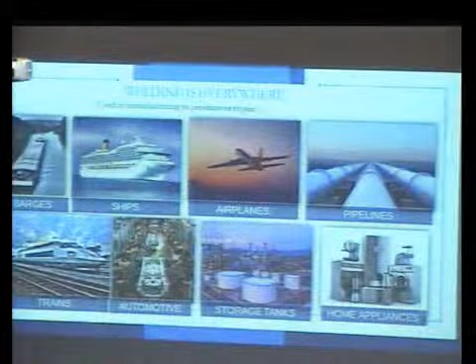So I want to talk to you about welding basics. I want to say basics and introduce how welding is. What about welding? That's the first question we can have. Welding is everywhere. You can't imagine a world without welding.

Barges, ships, airplanes, pipes, trains, automotive, tank storage, home appliances, bridges, buildings, ornamental ironworks, construction. You are sitting on a welded system. You lift your head up and you see welded structures. Welded structures are everywhere. But it's so common that everybody thinks it doesn't exist.

And welding is very interesting because we're welding steel. And steel is 100% and indefinitely recyclable. And in a world in which we talk about the Green Deal, where we've got societal responsibility, sustainability, welding is everywhere.

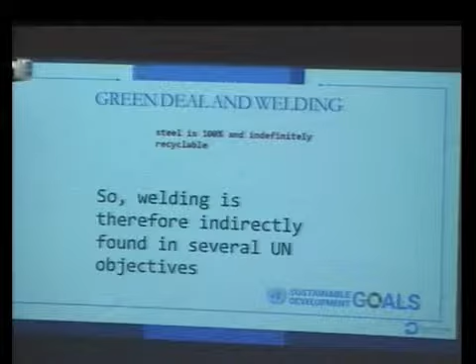Everywhere. And just for an example, if we talk about the sustainable development goals of the United Nations, there are 17 points. And in these 17 points, you can find more than 10 points where welding is present. For example, zero hunger. How can you achieve zero hunger without agro-food? Agro-food is piping, capacity, tanks, etc. When you talk about health, pharmacy, medicine, how can you make vaccines without welding?

It's impossible. When you talk about water, you need pipes, and pipes are welded. When you talk about energy, we'll talk about energy after, but energy without welding is impossible. Industry, it's normal, I don't speak about that. Civil construction, engineering, all is steel, all is welded. New energy, climate action, manufacturing, transport. Life below water. You have pipes, you have submarines, you have ships. We are everywhere. Everywhere is welding.

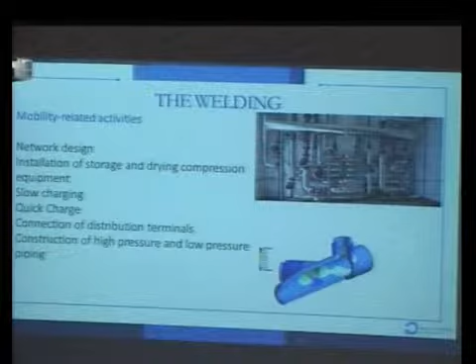Industrial pressure vessel companies are aware of the key environmental issue and actively participate in the deployment of industrial solutions that will allow the objectives to be achieved. Okay. Mobility, when you talk network design, installation of storage, drying, compression, slow charging, quick charging, connection, distribution terminals, all is welding.

You talk about gas, biogas, new gas, and so on. You have to tank them. You need skids. I don't speak about hydrogen. Everybody says the new generation, the new power will be hydrogen. Hydrogen, high pressure, low pressure pipes, storage, drying equipment. You talk about solar. It's good to talk about solar, but to put up your solar, you need structures, and structures are welded.

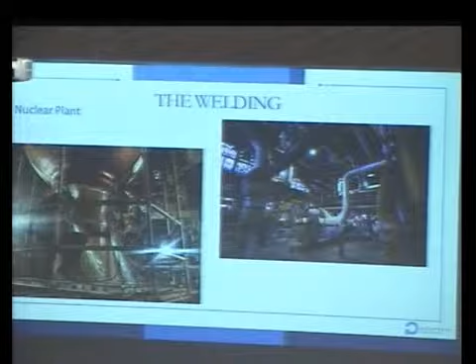Wind turbines are welded. And I finish with what we like in France, nuclear plants. A nuclear plant, what is it? It's a big steam system with pipes, with turbines, all welded. So welding is everywhere.

We can talk about the story of welding. Welding is very old. 2000 years before Christ, we talk about welding in the Bronze Age. People began to join parts together in the Bronze Age. Egyptians and other peoples were joining pieces of iron together. During the Middle Ages, we began to talk about that.

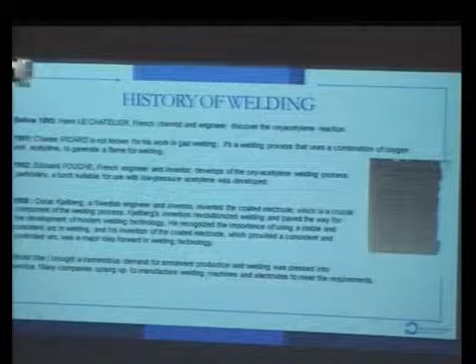But the real story of welding begins in 1901: Charles Picard, a Frenchman, worked on gas welding. The process is a combination of oxygen and acetylene. At the same time, Edmond Fouché, a Frenchman again, engineer and inventor, developed an oxyacetylene welding process. In 1908, Oscar Kjellberg, a Swede, had the first patent to weld with an electric arc.

And it's a shame, but war is always a time to develop new technology. During the World War, new welding products were made. Many companies tried to manufacture welding machines and electrodes. From 1920, the French Welding Institute worked on the development of welding. The first welding job was introduced in 1931, less than a century ago. It's very young.

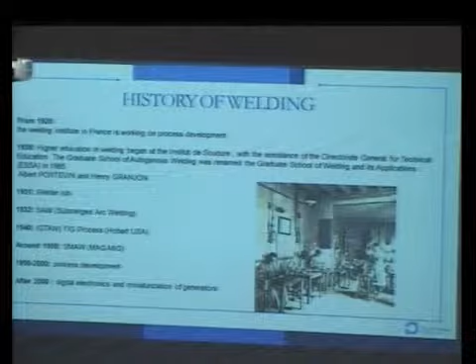1932, submerged arc welding. Around 1950, new processes. And the new technology is after 2000, very recent, with the development of electronics and miniaturization with data systems. At the same time, and that is very interesting, we developed an International Institute of Welding. What is it? In 1948, people from different countries said, we have to work together on welding. And they began to develop an International Institute of Welding.

And in 1963, there was the first publication of a review named Welding in the World, Soudage dans le Monde. At this beginning time, this review was in 2 languages, French and English. After, in 1992, with the development of Europe, it was extended to many countries in Europe, and in 2000, this International Institute of Welding was all around the world.

And today there are more than 34 active ANBs. An ANB is an Authorized National Body, a country authorized to provide welding training following this program. And more than 17 countries belong to this system.

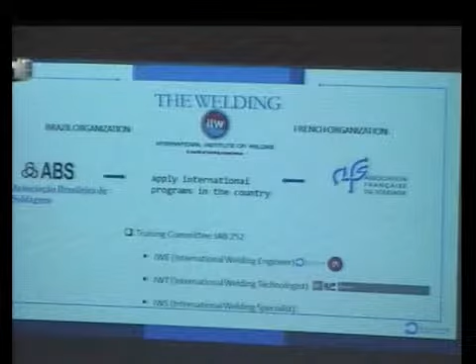That means that the International Institute of Welding applies an international program, and this program will be in a country. In France, we have the Association Française du Soudage, an association who takes the international training program and translates it in France. In Brazil, you have the Associação Brasileira de Soldagem. I don't speak Portuguese. It makes the same one. And there are 3 levels of training.

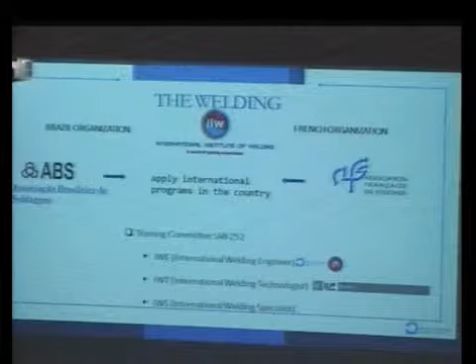IWS, International Welding Specialist. What is it? He's a welder who knows a little of technique. The second level is International Welding Technologist, a technician in welding, specialist in welding. And the third level is IWE, International Welding Engineer.

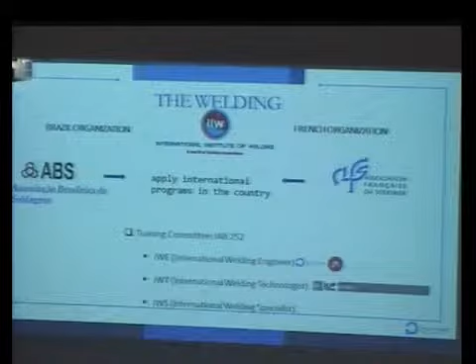The 3 levels are recognized by the IIW, and in Montpellier, at the University of Montpellier, we are lucky because we have two levels. We have engineer masters IWE in Polytech, and we make welding engineers. The students follow a training, and after they pass this certification, they can be welding engineers around the world. You have a Chinese, Brazilian, or someone who has the same diploma. You're sure that he has followed the same training.

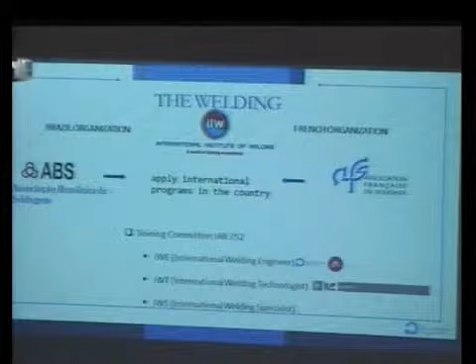IWT, we have it at the University of Montpellier too, technician, and we make the same program. And the two girls from Polytech did the IWT program last year. That is very interesting to show that welding today is around the world. We cannot say we are Brazilian and we weld in Brazil, we are French, we weld in France. We are around the world. It's globalization. And it's very interesting to see that a system is globalized.

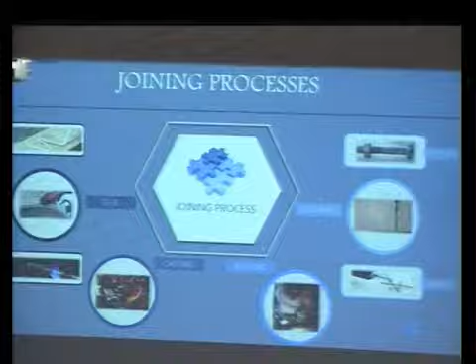And we assemble, how welding is made, by an assembly process by localized fusion of the edges. That is the definition. We assemble by localized fusion. Localized fusion, when you talk about fusion, you talk about heat. And the base of welding is a heat source. You have different types of heat source. It can be mechanical, it can be chemical, and most of the time it's an electric source.

Some of you are maybe chemists, and you know when you have steel and you make high temperature, you have oxidation, oxidation with the oxygen of the air. So you obligatorily have a protection mode against the effect of the air. And the two first points are theoretical. You have two pieces, you have heating, you have a mode of protection.

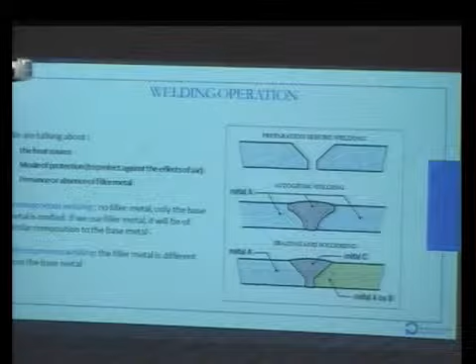But when you think as a mechanician, it's very difficult to have two pieces exactly one against the other. You always, or almost always, have a gap between the two pieces. So you have to put in a filler metal. If the filler metal is the same as the base metal, we are talking about homogeneous welding. When the filler metal is different, we are talking about heterogeneous welding.

I made a slide about health and safety in welding. When we talk about heating, very hot temperature, it's burning. You have risk related to fumes. When you are welding, you melt metal, you have fumes, steam of steel, of iron, of different metals, and it's dangerous. We use shielding gas. When you use shielding gas, there is a risk of anoxia. When you have metal at high temperature, more than 1,000, 1,500 degrees, you have risk of projection and hot parts.

When you have an arc, you have optical radiation. You have noise. When you use electricity, you have electrical risk, electromagnetic fields, and fire and explosion. So people who weld have to be protected. And you see on this picture a minimum, with gloves, with helmet, and so on.

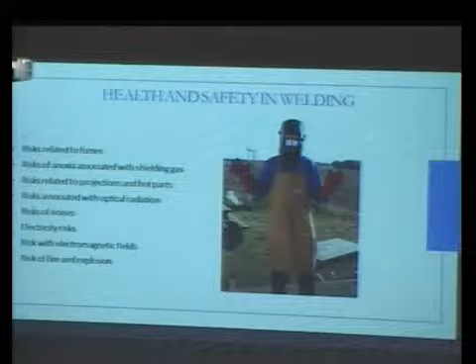Now I want to talk to you about the consequences of the welding operation. When you want to weld, you have to make high temperature. You have expansion and shrinkage. At low thickness, high deformation, but low stress. At high thickness, little deformation, but very, very, very high stress. Because you don't have deformation, the deformation is inside the metal, and you have big stress.

After welding, we often have to make a heat treatment. We have to make high temperature to reduce residual stresses. That's the first point. The second point is modification of the metallurgic structure. When you bring steel to high temperature, you change the structure. For iron steel, you pass from BCC to FCC, so you have modification of the structure.

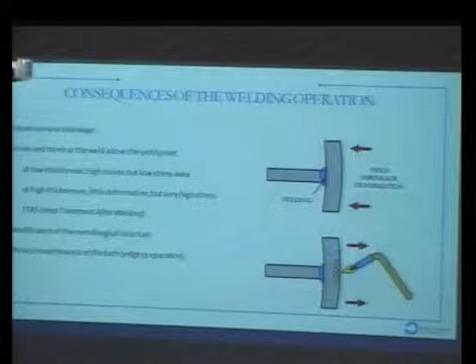The first part is easy to understand, but we have to think about it. When you weld, you melt metal, and when you melt metal it becomes liquid. The liquid wants to fall, and the big difficulty in welding is to maintain this part of metal that is liquid.

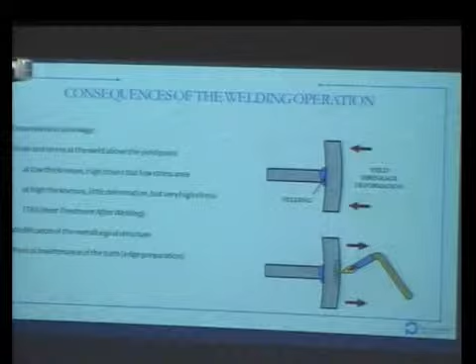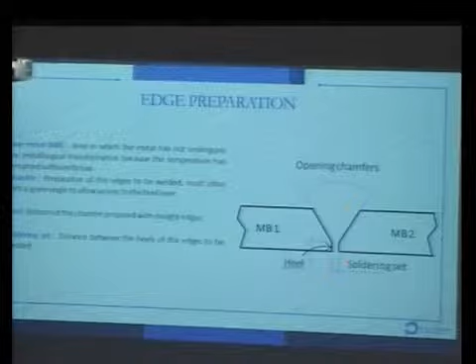These three parts are consequences for the welding operation. For example, when you weld base metal 1 and base metal 2, if you take a big thickness, more than 3-4 millimeters - I say big, but it's not that big - you want to have here a laser point, and you want to have here metal liquid. If you take all this metal liquid across this thickness, it will be very heavy, and too heavy, it will fall and make a hole. So you have to prepare it with a chamfer here.

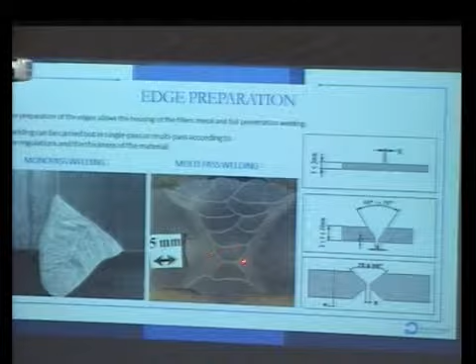You have to prepare the joint. We want to make one root weld, and then make more welds to fill it. For example, here you have a root, and the preparation was like that. You make a root here, and then we make different passes to fill it. In this case, the root is here, and you have 1, 2, 3, 4, 5, 6, 7, 8 - eight passes on one side and two passes on the other side. If you are thinner than 3 millimeters, one pass is enough. We call this monopass welding or multipass welding.

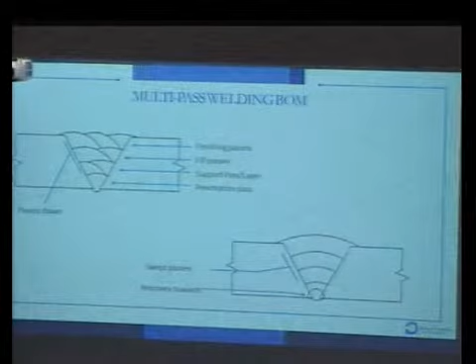That is an example of penetration roots. Second point: the thermal aspect of the welding operation. When you weld, if you take a thermocouple, you can measure the temperature. When you weld at a point, the temperature grows up and then falls down. Here it grows up, and by definition it's higher than the melting point.

So the time spent around 800 degrees is very important, because if this time is very short, you have a risk of martensite. If the time is longer, you don't have this risk.

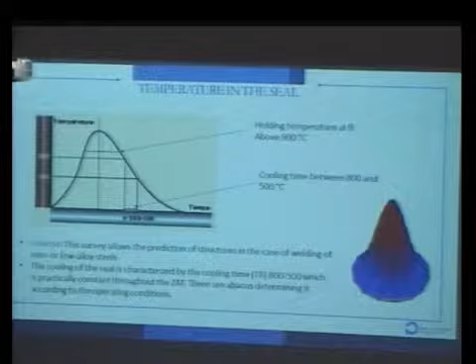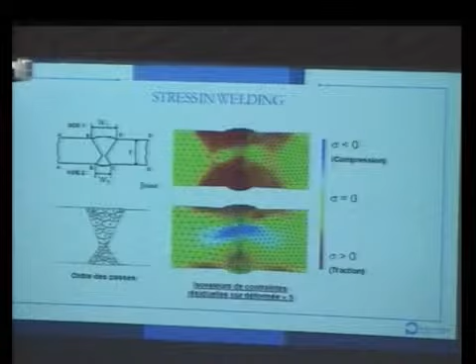When you weld, you have here the welded zone. By definition, this welding zone is higher than 1500 degrees because we melt it. Far away from the weld, you are at normal temperature, but in between you have a zone called the heat affected zone. It's a zone where temperature is higher than 900 degrees, and for iron steel we have a change due to this temperature. We have stress here. For example, you can see the molten zone from pass 1, the molten zone from pass 2, and on both sides you have a heat affected zone - the zone where the metal was transformed.

If you take a low carbon steel, as used in welding, you see that at this time you go up into the austenite phase, and if you cool rapidly, you can have a risk of quench. So don't forget: you have the melted zone, and on each side of it you have a risk of quench, and it could be very different.

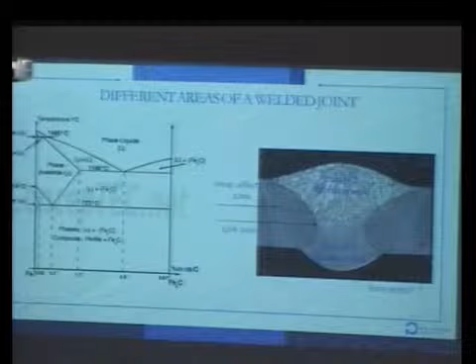When you weld, you have stress in the weld - deformation, and during welding you have different stresses, compression and traction, which create deformation or stress inside the weld. So when you weld, you have a melted zone, and around the welding zone you have different weld structures.

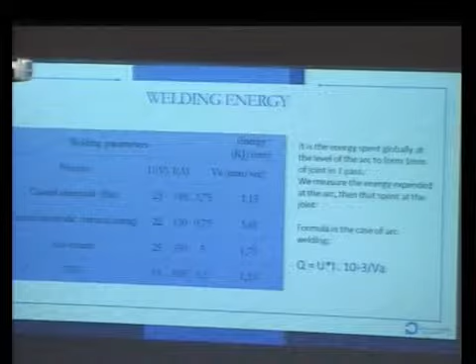What is important? The first very important point is the welding energy. If you put in more energy, if the energy is high, the piece stays hot inside, and the cooling will be slow. If the energy is low, it will cool very fast, and you have a risk of quench. So the heat input during welding is very important in determining the risk of quench.

For example, with two pieces, the cooling will happen here. With this kind of welding, the cooling will occur here, here, and here, and there will be more risk of quench than with lighter cooling. Often, to prevent the problem of quench, what we have to do is preheating. We want to preheat the piece before welding to prevent the risk of quench.

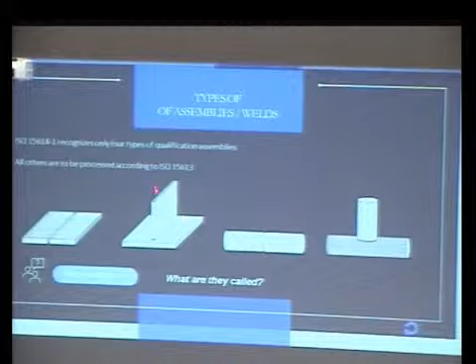For example, here you have three parts. Here is a butt welding with tubes, and here you see that this kind of welding will cool very speedily compared to this. And maybe for this you have to make a preheat, and this you don't have.

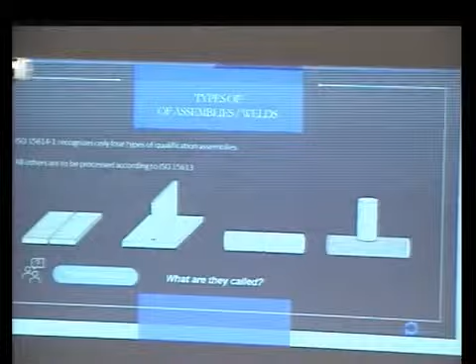By conclusion, what I want to say is that welding, generally, requires big energy to melt the steel, and many consequences result from this. With this consequence, we have deformation, for example that.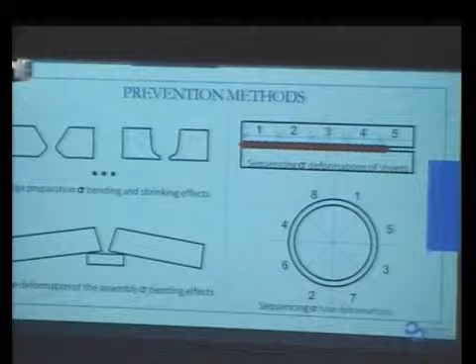When you have to weld, you have to think about the consequence of welding. If you have any question, I'm here to answer. No questions? You made welding before? Yes? With Professor Ivan, maybe? Okay, so you know what I explained.

Okay, any question? No question? So if you don't have a question... Thank you, I learned lots of things.

Question: the origin of energy, we know it can be optical, like you can hit with laser. You didn't mention it because it's just a small amount of welding, out of five big kinds of energy.

Electric energy has two parts: with arc, 80%, and part with Joule effect. That is electric. You have chemical energy with gas, a mix of acetylene and oxygen or different gases. You have mechanical energy, for example friction or friction stir welding. You have friction and mechanical energy put into this energy to weld.

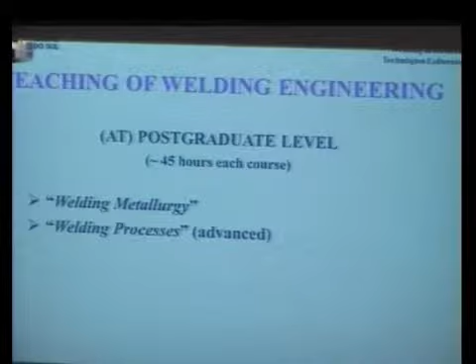For the postgraduate level, we have 3 main classes: welding metallurgy, advanced processes, and design of welded joints. Of course, we offer those classes when we have students.

Nowadays we have few students. In the past we had a lot of students in postgraduate, and that's a problem for us as well. I know it's a worldwide problem, but that's true.

We have all conventional welding processes: gas tungsten arc welding, gas metal arc welding, shielded metal arc welding -- everybody has seen this in the streets, people welding. That's shielded metal arc weld -- plus submerged arc, resistance welding, plasma cutting only, oxy-gas cutting and welding.

We have a small robot you've seen yesterday. It's a good robot and a very, very good power source. We had an extrusion press to make electrodes. We can make any kind of electrode.

And in our laboratory was made the first electrode in Brazil to weld underwater -- wet welding. You go up to 30 meters and weld wet, in contact with water. And Petrobras uses this nowadays.

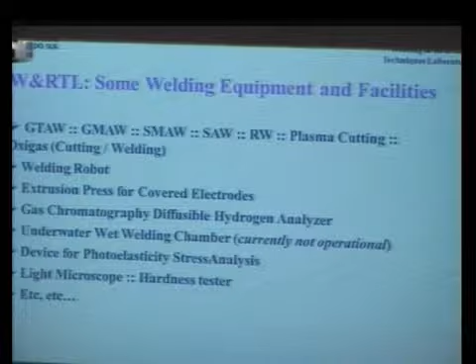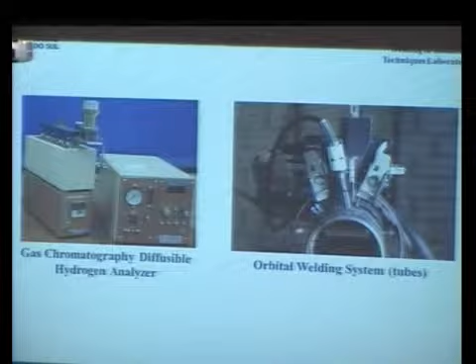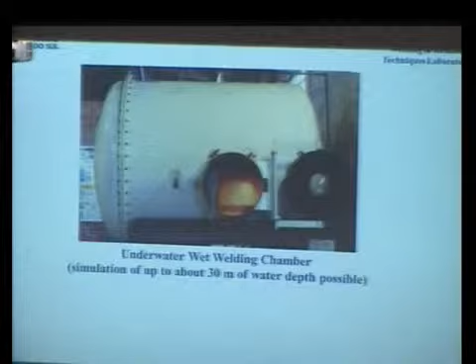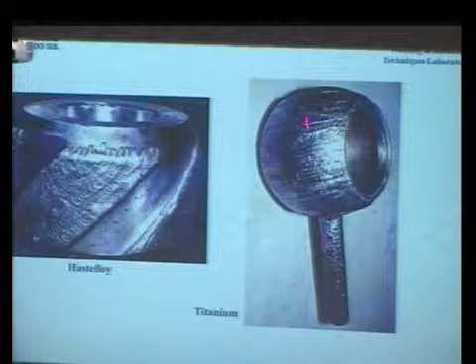With time, the acids attack the surface of the valve. And then you have to weld it all again. It's commercially pure titanium. You have to make a chamber with high purity argon. It's very expensive, this one. And weld during one day, things like that.

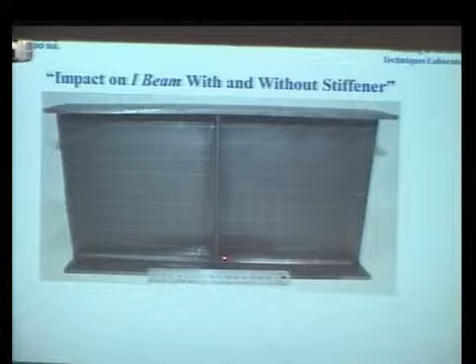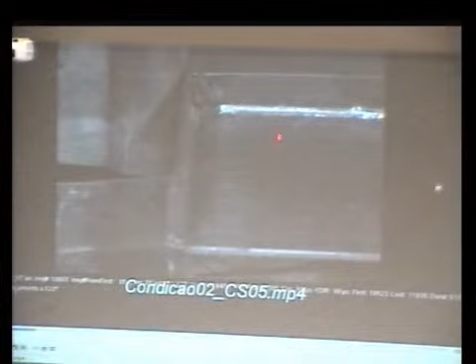You can show the second. That is with stiffeners. Look at the difference. It resists much more. Of course, our interest is in the welding, the behavior of the welding. What we're noticing now is that it's much better to put there a more ductile weld than a more resistant weld. The problem is not strength, it's ductility.

It's like how to speak to people, for example, to have empathy and things like that. It's the same, ductility is the same. You have to have ductility, not to be very rigid. You have to exchange interests. That's very interesting to notice in this. Okay, we're going to the end, and then I'll ask you some questions, okay?

We had in the past some experience with finite element analysis of mainly fillet welds, and you have very good computer equipment there. Professor Mazzaferro works a lot with this. But this is mine, I did it, only to prove the following. You cannot use finite element analysis in the elastic state. I'm lacking the word. You must use it in the plastic state.

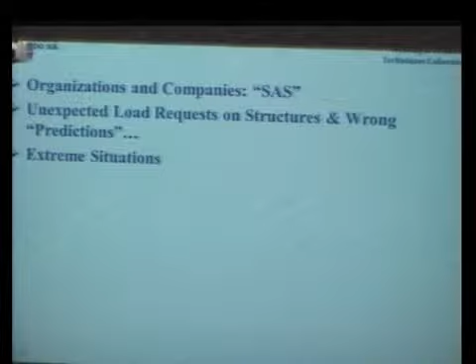That's an important point. The second point is that our engineers in general don't look for unexpected loads. They make wrong predictions. They believe too much, I think, in mechanical tests and so on. They think that a tension test truly gives the ductility of a metal. That's not true. We have to be prepared for extreme situations. The climate is changing. That is important also. We must not make idealizations on structures and load conditions.

That has relation, of course, with this one. Those two are the same things. Also, idealizations on information. Not all information is real information, is right. Materials in people. There is a real world. Many students don't know that there are inevitabilities, things that the British, for example, call acts of God. No one knows what causes them. This exists.

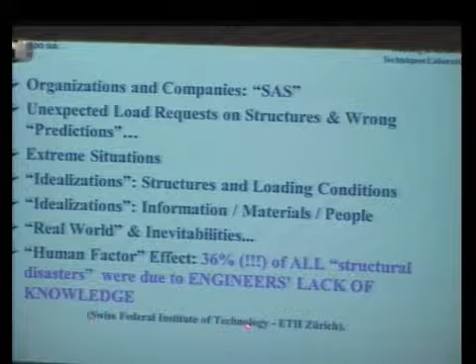And to end, a question of the human factor. About 20 years ago, the Swiss Federal Institute of Technology made a study with 800 consultants, engineering firms, and they discovered that 36% of all structural disasters were due to engineers' lack of knowledge. Engineers' lack of knowledge. That's brutal, I think.

Well, thank you very much for hearing me, and I would like to ask you, Professor Dennis, first of all, in which kind of engineering course in France do you study welding technology? In which one? Mechanics, materials?

In France, we have three kinds of engineers who become welding engineers. The first enter from mechanical; they have a mechanical base and they learn welding. The second are material engineers. They come from materials, from steel and so on, and they enter welding through welding metallurgy. And the third are people from electricity. Because most processes in welding are electric, some engineers come from electrical fields and discover welding through electricity.

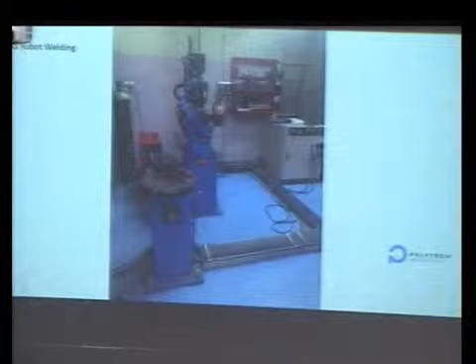We have 6 SMAW, new generation, very small, a water jet cutting from 1 meter to 1 meter. We can cut metal without heating, and it's very interesting. It does not transform the metal. A small MAG robot welding, like you. Cutting, forming, oxy-fuel cutting, plasma cutting, a small table of plasma cutting.

No, this one is not underwater. No, we can, but it was too expensive. Yeah. Yes, we cut underwater with 2 centimeters of water. Oxy-fuel welding, orbital TIG to weld tubes.

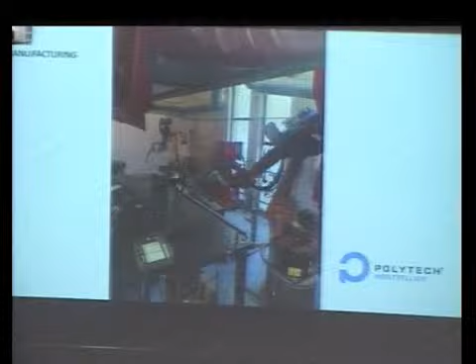We have in research WAAM, 3D printing by welding. Wire arc additive manufacturing. And we make 3D printing with welding. And we work in research on the mechanical characteristics of this kind of structure.

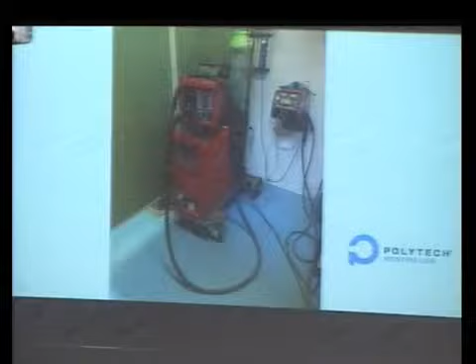GMAW, steel and carbon steel, new generation, old generation. The last generation of GMAW machine, GMAW mini. Here you have a system to record all the parameters during welding. The student welds, and we record all the parameters on the computer, and the student can see all the parameters and what happened during the welding. And all can be recorded to repeat what to do.

That's the GMAW new generation, the new one. GMAW, GMAW saving parameters, GTAW, TIG, new generation, old generation of TIG, TIGer process, if you know. A small plasma welding. We talked before about high density of energy. With plasma, we try to have an arc, but concentrated. With the mechanical system, the arc is concentrated. We have more energy in the same surface.

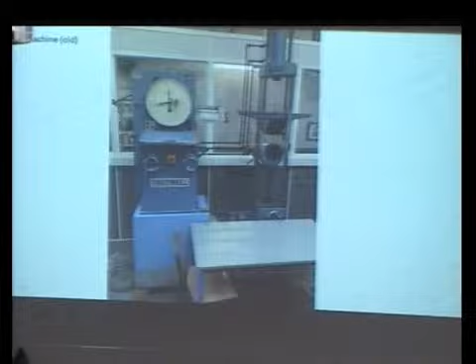GTAW. We have an electron beam machine, a small electron beam machine. Yeah. And we have a very expensive machine, a vacuum furnace to make brazing, for example. A tensile machine, I wrote old. She's old, but maybe it's the best machine that I know. Because the student sees, during the test, he sees here what's happening. He sees the pen. He sees really what's happening.

A hardness machine, a small furnace, a microscope like yours, with a polisher to prepare the samples, a Charpy test, really not bigger than yours. Yeah. A tensile machine, new generation with a computer. You don't see anything. You see a computer. A big 40, 50 tons tensile oil machine. It's very interesting to make bending in welding. We make high thickness, more than 10 millimeters tensile. And for 40 tons, when you tensile 40 tons, it's very impressive.

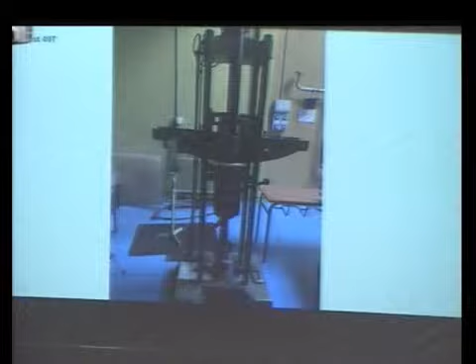And I don't know if you go, it's a small link. I don't know if you can go. A film we made in Polytech to present a laboratory, but the data computer is more complicated. Maybe on my computer. Yeah. So that part in Nîmes.

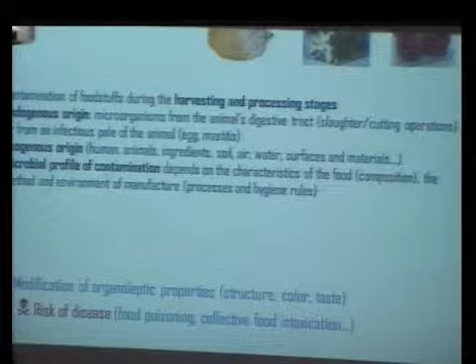Now, let's talk about lipid oxidation. So lipid oxidation is a complex chain reaction. The objective is not to learn all the steps of this reaction, but to understand what are the main risks with this reaction. So it is the reaction that occurs in high-fat foods. And it is a complex set of decomposition and polymerization reactions. It involves unsaturated fatty acids, and you need dioxygen.

But there are different ways to have lipid oxidation. It can be favored by light radiation, but also transition metals. We also have some enzymes like lipoxygenase that are involved in lipid oxidation. How do you know that your butter or your fish is oxidized? How do you know? What? It changes color?

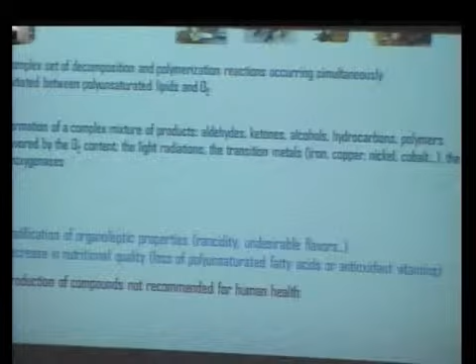It can be, but it's not... the smell. Yes, there is rancidity. You have a modification of organoleptic properties like rancidity, undesirable flavor. It can change the color, but it's not the main effect. But there is also a decrease in the nutritional quality because it's an oxidation. So what will happen if you have vitamins? The vitamins will fight against this oxidation. So you lose the antioxidant capacity of your products because the antioxidant compounds will fight against the lipid oxidation.

Are you going to die if you eat some oxidized lipid? No, not today, not today. But yes, it is a risk, but in the long term, because the consequence is the production of compounds not recommended for health. And if you have the habit of eating oxidized butter, chips, and so on, yes, in 10 or 20 years, perhaps we can have some problems. But tomorrow, no. So it is also an important reaction to be avoided in products.

Another big family of reactions that are involved in food spoilage is non-enzymatic browning. As the name of this reaction indicates, you are going to produce some colored brown components. The famous example of this kind of reaction is caramelization, when you use sugar. And how do you make caramel?

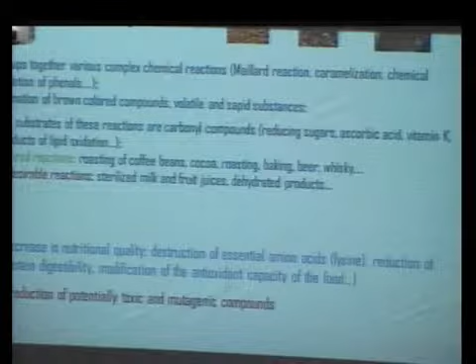So, as I told you, it groups various complex chemical reactions. The substrates of this reaction are carbonyl compounds, reducing sugars, but also ascorbic acid, vitamin K, products of lipid oxidation, and so on. And it needs heat. And what is important, it can be a desired reaction. In some food transformation processes, we need this reaction to develop aroma and taste.

For example, in all the roasting processes of coffee beans, cacao, the roasting, the baking, the beer, the whiskey, the brown color of these products comes from the Maillard reaction. But in other cases, it's not desired at all. For example, when you sterilize milk, you don't want to have brown milk. You want to have white milk.

When you concentrate fruit juice also, you have to avoid this reaction. What is the consequence of this reaction? We have a decrease in the nutritional quality, because during this reaction you have a polymerization between reducing sugars and essential amino acids in proteins. So we have a loss of essential amino acids in foodstuff. You have also a reduction of protein digestibility due to the polymerization between all these components, and a modification of the antioxidant capacity of the food.

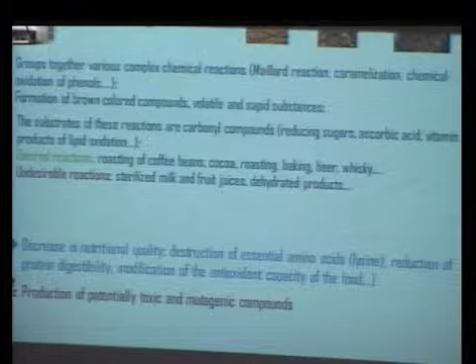Okay, the last reaction I want to tell you about today is the enzymatic browning reaction. The consequence is also the production of brown colored pigments and so on, but do you need heat to make that? No, you only need polyphenols in fruits and vegetables, and you need dioxygen. So it's an enzymatic transformation in the presence of dioxygen, a transformation of phenolic compounds into quinones, then into colored polymers. The enzyme involved is polyphenol oxidase, and we also need oxygen.

You are going to form color pigments, melanins. They are often brown or black, but they can be pink, red, and blue. As for non-enzymatic browning, it can be a desired reaction. For example, in the ripening of dry fruit, dates, grapes, in the fermentation of tea, coffee, cacao, we can develop this kind of reaction to develop the color of the product.

But when you cut your apple, when you cut your avocado and so on, you don't want to have a brown guacamole. You know what guacamole is? No, it's green, it's not brown. So you want to avoid that, and you have to fight against this reaction in this kind of product. So you have a modification of the organoleptic properties of phenolic compounds, color, taste.

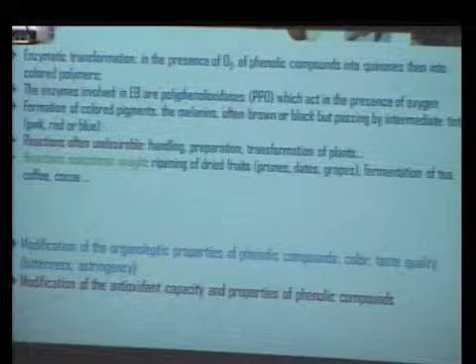It means that decreasing the water content in food improves the stability of food. So I think it's not news for you. Our ancestors discovered that also. What did they do to conserve raw materials, our ancestors? Tell me some processes that they used. Salting? Yes. Salting, another one. Drying, of course, drying. So based on empirical knowledge, they already knew that reducing water improves the stability of foodstuff. Why? We are going to show why.

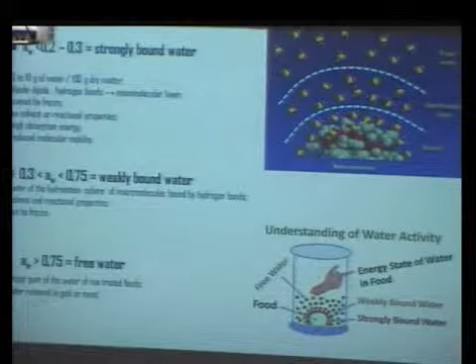Then, when the water activity is above 0.75, we talk about free water. So of course, this water is the main part of non-processed foodstuff, of course, it's the water retained in meat, in gel, and so on. We talk about free water. So when you measure the water activity of your product, you can see if you have strongly bounded, weakly bounded water, or very free water.

Okay, fine. It's like, you know Thomas Pesquet? He's a famous French astronaut. An astronaut goes to the spatial station, like that.

Thomas Pesquet is eating dried product every day. And I think he was happy to return to Earth and have a Big Mac, or a McDonald's, or something very soft with a high moisture content, you know.

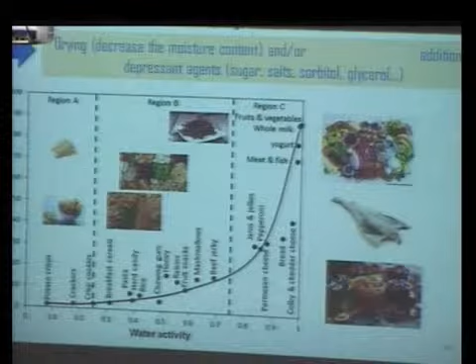So what is the solution to decrease water activity in food? It's not only drying. You can add depressant agents like sugar, salt, sorbitol, glycerol, and so on. There's a list of depressant agents in the literature, but only a few can be used for food stabilization. Because when you use salt, you change the taste, so you're not going to put salt in jam, for example, or sugar in your meat. In fact, there are very few that are really effective and efficient to reduce water activity in foodstuff.

There is also a good correlation. What is important is that Labuza, in the last century, found a good correlation between the food spoilage rate and the water activity.

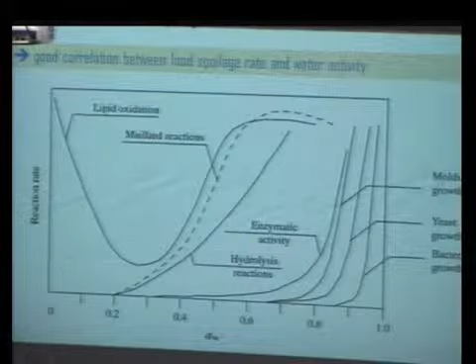Here you have the main degradation reactions I presented at the beginning: microbial growth, lipid oxidation, Maillard reaction, enzymatic activity. What we can see is that if you consider microbial growth, it's very easy to limit the growth of microorganisms if you decrease the water activity of your product. If you reach 0.7, you're quite stable concerning microbial growth. This can be reached by drying, but also by adding depressant agents.

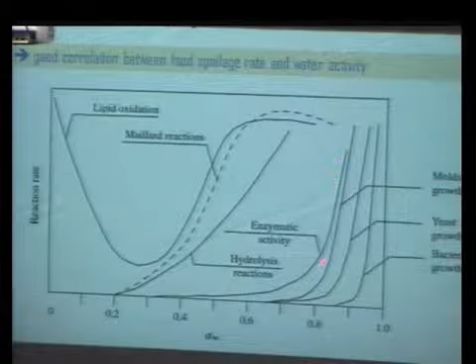Look at the enzymatic activity. It's also going to increase when the water activity is above 0.5 to 0.6. It means that when the water becomes more free, the enzymatic activity can increase.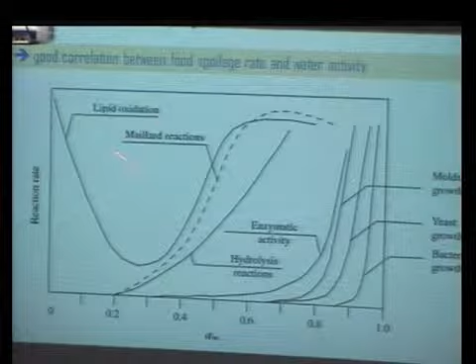What I want you to remember is the shape of these two reactions, lipid oxidation and Maillard reaction. What we can see is that even at low water activity, we can have lipid oxidation. So what is the solution for lipid oxidation?

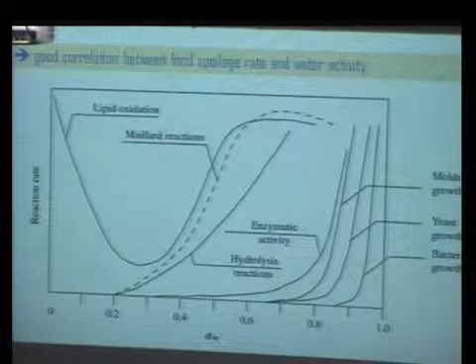Have you guessed how to reduce lipid oxidation at very low water activity? What does this reaction need? Lipids, of course, but also dioxygen. So you put the product under vacuum. That's why a lot of fish and similar products, even when frozen, are stored in vacuum packages, to avoid the presence of dioxygen and to avoid oxidation of lipids.

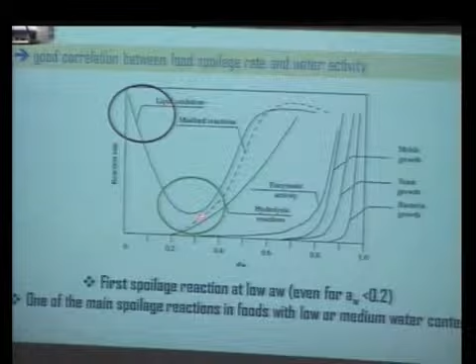What is also important is this area. You can see that if you want to decrease the rate of lipid oxidation, you can process or formulate your product to be in this area of water activity. You are going to minimize this reaction.

Another thing to focus on is the Maillard reaction. You can see the maximum rate of Maillard reaction is at intermediate water activity. When you concentrate your milk, or concentrate a fruit juice, what do you do? You take off water. It's okay for everyone? So you are going to decrease the water activity.

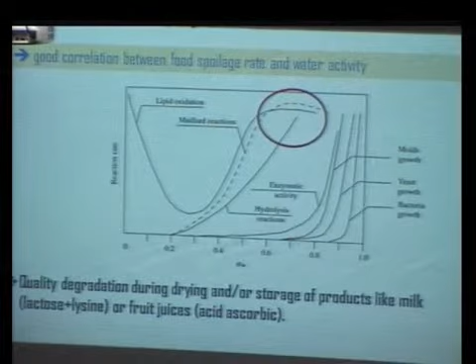But if during the process you go slowly through this area, or you decide that since 0.6 was enough to stabilize your product against microorganisms, you stop your concentration at water activity 0.6 — no, that's not a good decision, because you'll be at the maximum rate of this reaction. So this diagram is a very useful tool to predict the stability of your product, but also to master your process.

Another important tool for future food scientists is the sorption isotherm. What is it? It's the relation between the water activity and the water content of a product, and as we can see, we have a curve. How is it determined? You take a product, for example a dried product, and build the adsorption curve: you add water and measure the water activity. When you do the inverse, drying a wet product, we talk about desorption curves.

Why is it important? First, let's talk about hygroscopicity. What is hygroscopicity? It's the influence of the change in ambient relative humidity on the water content of a product. And you can predict this hygroscopicity when you look at the shape of your sorption curves. Look at that.

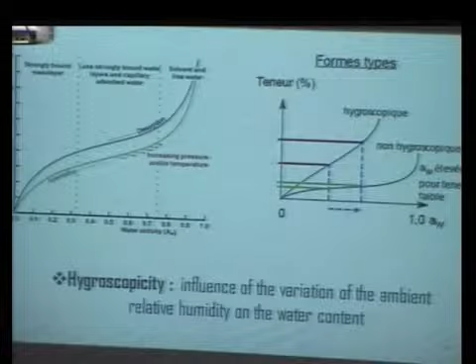Another thing to be noticed on these sorption curves is the hysteresis. The hysteresis is, as you can see, in the intermediate water activity area, the curve of adsorption is not the same as the curve of desorption. There are a lot of products presenting this hysteresis.

What does it mean? That means that a product for the same water content, here, imagine you have this water content, if you have, you can be here. For the same water content, the product will present a water activity less important than if we are in the adsorption curve. The product is more stable if it's desorbed as compared as rehydration.

Okay, so it is also an important fact to be noticed because, for example, you produce a powder, you are very happy because you are very stable, you have a very low water activity. Take this one, it's more representative. You are happy, you are at a low water activity, the product is stable. But the product is not in the packaging and it is quite hygroscopic.

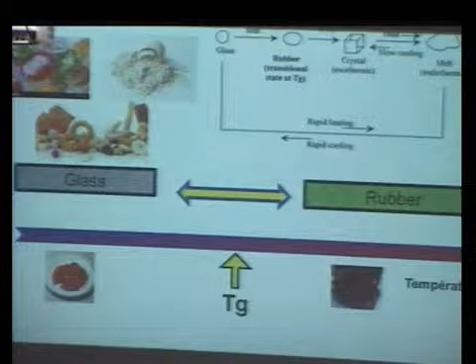So in few words, the glass transition is a reversible transition. There is no heat absorption or desorption. It's a transition of the second order. Transitions of the first order are evaporation, freezing, and there is heat involved and so on. Here, there is no energy involved. It's a reversible transition from a brittle glassy state to a plasticized rubbery state.

And this transition is characterized by a temperature. And there is a rapid modification of the physical, mechanical, electrical, and thermal properties of your product. There is an abrupt modification of free volume and so on. And as I told you, this temperature is strongly affected by water content. And what is the problem in food stability and so on?

When you have powder, you can have a collapse of your powder. When you open, for example, milk powder, and you let your milk powder open, I don't know, 1 or 2 weeks or more, and you come back, you see it is no more a very nice powder. You have some blocks like that. What happened is glass transition.

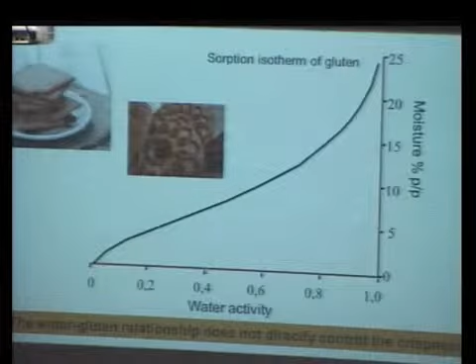I don't know if I have time to show you that, but this is a relation between sorption isotherm and glass transition, just to show you how to use these tools. For example, when you make biscuits, when you cook this kind of products, you want your biscuits to be crispy biscuits, you know. But here it is the sorption isotherm of gluten, okay?

But the relation between water and gluten does not directly tell you if your biscuit will be crispy or not. It will tell you if it is stable or not. Stable against chemical reaction, biochemical reaction, microorganism growth, but it's not going to tell you if you are going to keep the crispness of your product. So we have another tool, the relation between the glass transition temperature of gluten as a function of water activity.

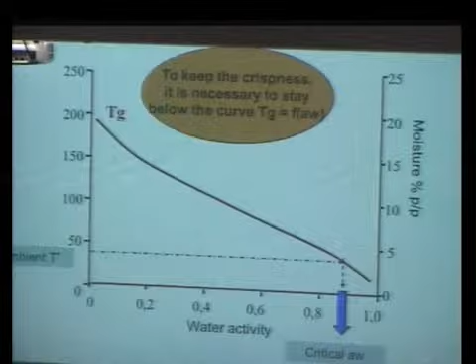But it's not very easy to have in your kitchen or in your industry something to measure water activity and so on. What you measure is, when you formulate a product, you consider the quantity of water you add. So you mix both curves, both tools. We mix the glass transition curves here, and here the sorption. So as we saw with these curves, we determine the critical water activity to keep the crispness, and when we report the water activity on the sorption isotherm, you can find the critical water content that should not be crossed.

For example, we are in a company that is producing cookies or biscuits, and you have to master the cooking step. I have to cook, to dry, doing the cooking, the drying of the product, of course, and you have here the critical value that should not be crossed. You should cook your product to be here, okay? And if you are here, your product will not be crispy and so on. Okay? It's an illustration of how you can use these useful tools to master the stability and the quality of your product.

So to conclude, I just want you to remember that the role of water in food is complex. The stability of food products depends on the reactivity of water. So you are going to use the water activity tool, the sorption isotherm and so on. And also it depends on the molecular mobility of water in these matrices. And so you have to consider also the glass transition of biomolecules in foodstuff. So you have two tools.